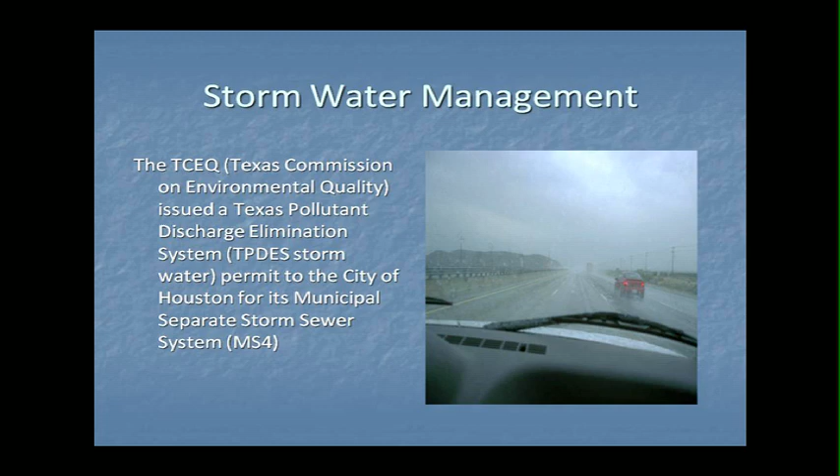Our MS4 permit is called Separate Storm Sewer System because you can have some cities or states that combine their sewer system. Both sanitary and storm will go to the treatment facility. Here in the state of Texas, they're separate. The storm sewer goes directly to the bays and the bayous and to Galveston Bay. Our sanitary goes to treatment facilities.

Now, even though I said that MS4 is a municipal separate storm sewer system, you still may ask, well, what is a municipal separate storm sewer system? It's anything. It's your storm sewers, it's your ditches, it's anything that will carry storm water. When it rains, the rain water has to go somewhere and it's channeled off to one of our collection systems, and it is discharged directly into the bays and the bayous.

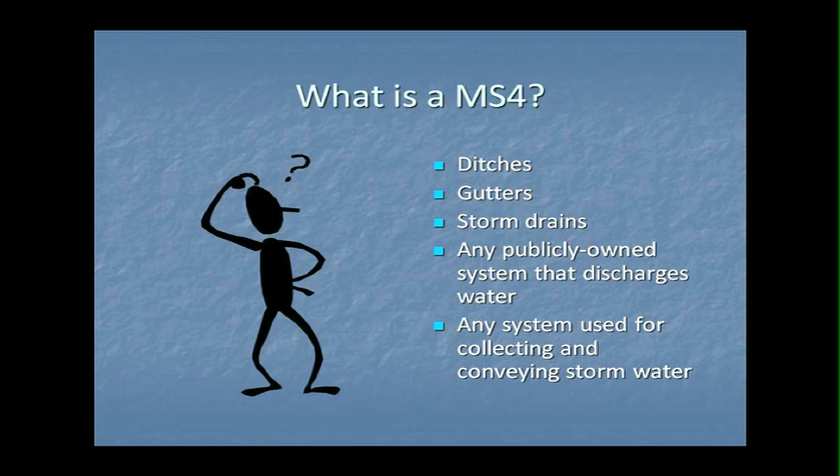Okay, what is the reason for a stormwater permit? It helps prevent pollutants or minimize the impact that pollutants have in our streams, lakes, bayous, wherever you may fish or wherever there may be aquatic life.

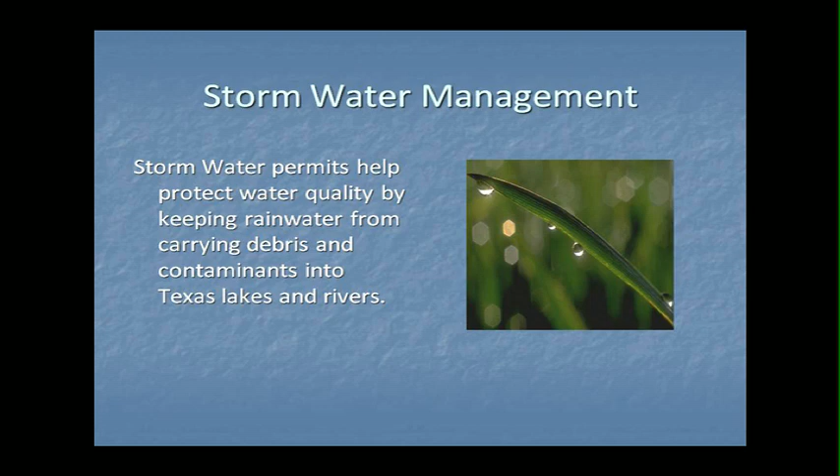City of Houston involvement: because we do have an MS4 stormwater permit, we are required to implement programs to ensure that what leaves the City of Houston's storm sewer will minimize the impact on the state of Texas waterways. And in doing so, we have 8 programs that we have to adhere to in order to come and remain in compliance with our stormwater permit. And one of those programs is to effectively prohibit non-stormwater discharges.

Now, because we do prohibit non-stormwater discharges from entering into our sewer systems, even though there are going to be some circumstances where there's going to be some type of discharges, we can allow certain non-stormwater discharges to enter into our storm sewer system, because, as everyone knows, nothing should go into the storm sewer but rainwater. And the reason why is that we do not treat our

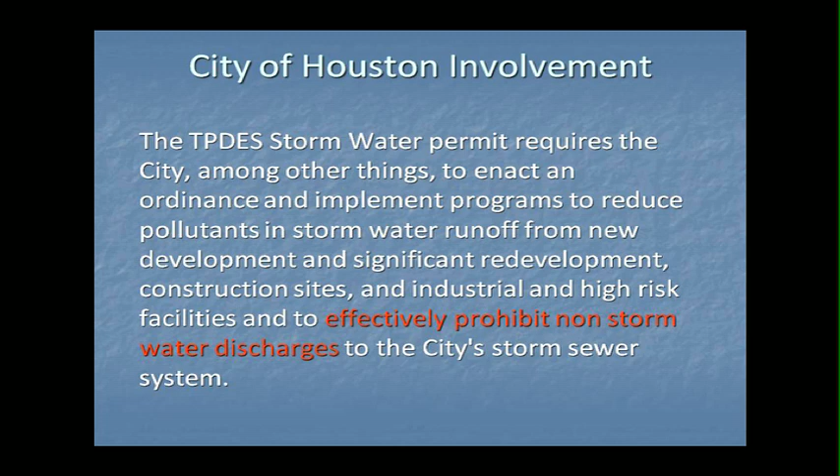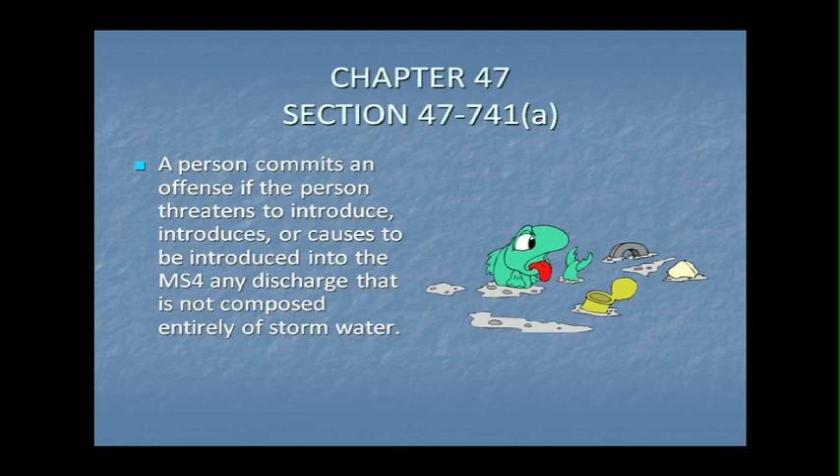in our ordinance, we have offenses in place so that we can enforce our ordinance so we will remain in compliance with our permit. And one is that you commit an offense if you threaten to introduce, or cause to be introduced, anything into our storm sewer system that is not composed entirely of storm water. So in other words, if you introduce or cause to be introduced anything other than storm water into our storm sewer system, you have committed an offense.

Now, as I stated earlier, there are some non-stormwater discharges that are allowed. And with some of these, there are certain conditions that you have to be in compliance with in order to discharge those. Say for instance, potable water. It has to be dechlorinated. Another one that would have to be dechlorinated is swimming pools. So just because we're saying that you can discharge potable water does not necessarily mean that you can just go ahead and discharge it, especially if there's chlorine in it.

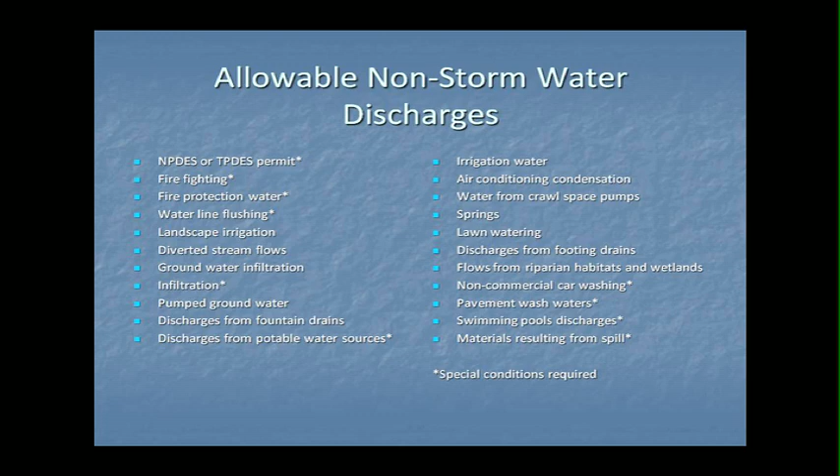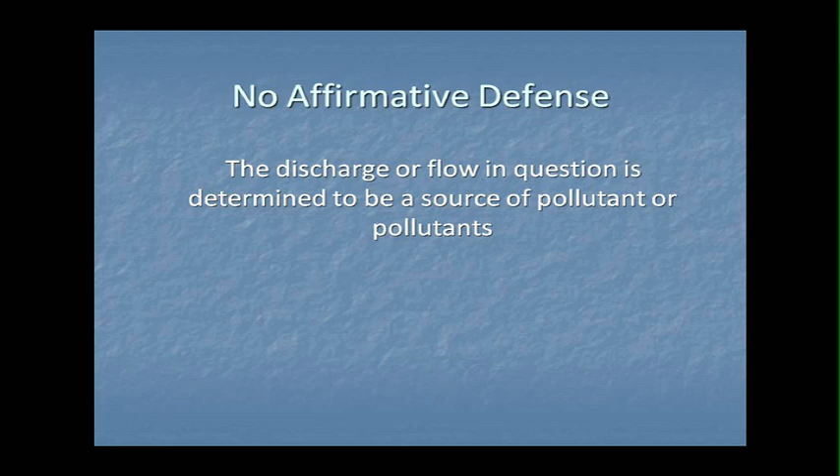And because of that, just because we do allow those non-stormwater discharges, you cannot use that as a defense if it is deemed that it is polluting our storm sewer system. Okay.

Several years ago, I can't remember when, we came up with some best management practices, guidelines, not a permit, but guidelines to help some out when they are dealing with discharges or cleaning and what have you. When these guidelines came out, we used our ordinance as well as our permit to put these guidelines, not a permit, guidelines together.

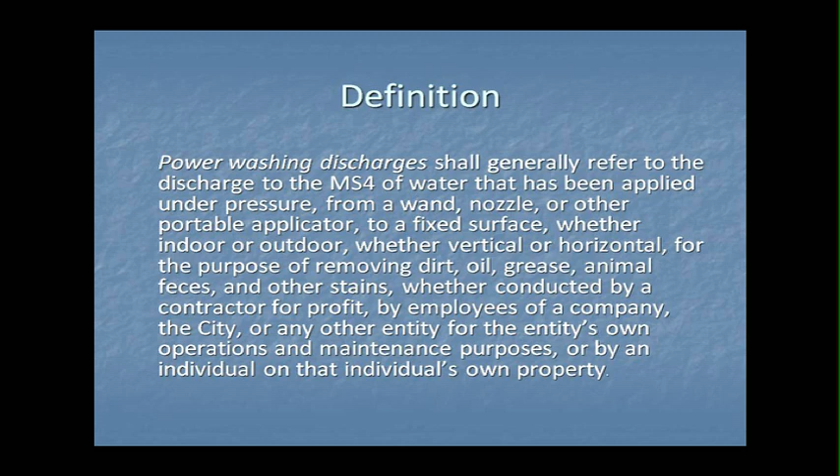And this was for cosmetic cleaning, and this is the definition of power washing that we address in these guidelines, not a permit, guidelines. And it's self-explanatory. Anything that's used under pressure to remove dirt, oil, grease is considered power washing. Okay. In the guidelines, we addressed these four categories of activities.

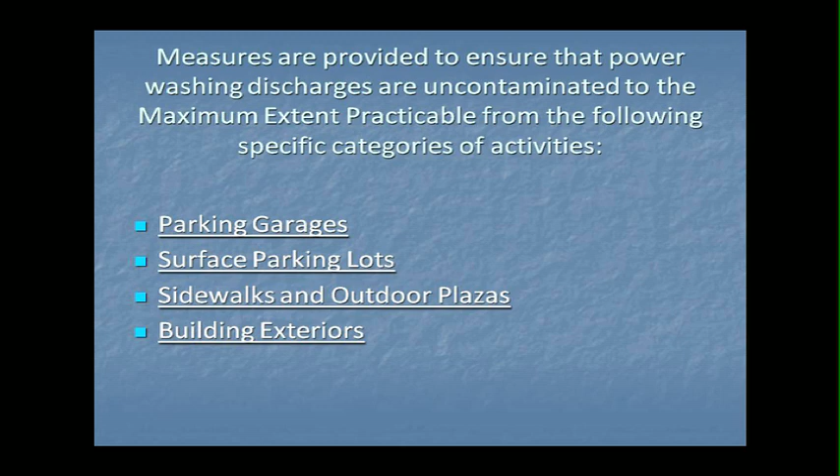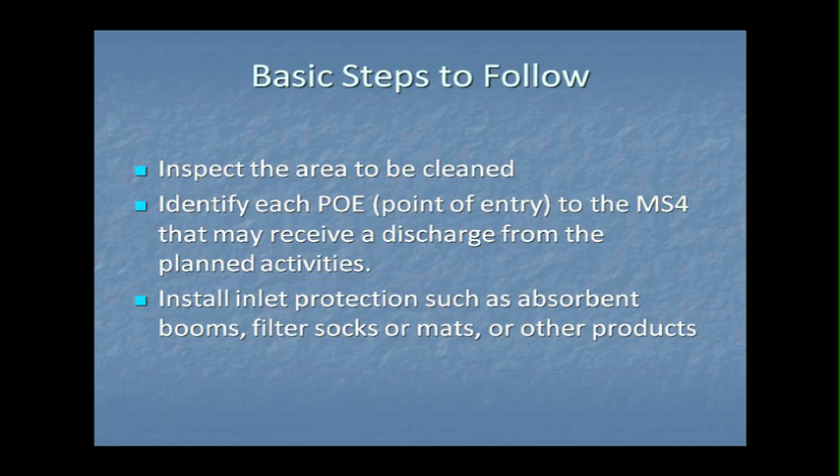And these are some of the basic steps taken from the guidelines. Inspect the area to be cleaned, locate the point of entry to the MS4, install inlet protections such as absorbent booms, filter socks, mats, or other products. And during the process, any inlet protection that is observed not to be functioning properly shall be promptly repaired or replaced. This is one of the steps that people most commonly don't follow.

When you lay down your inlet protection, some just go ahead and start cleaning or doing their activity, and not come back and check periodically to make sure that that protection is doing what it was designed to do. Yeah.

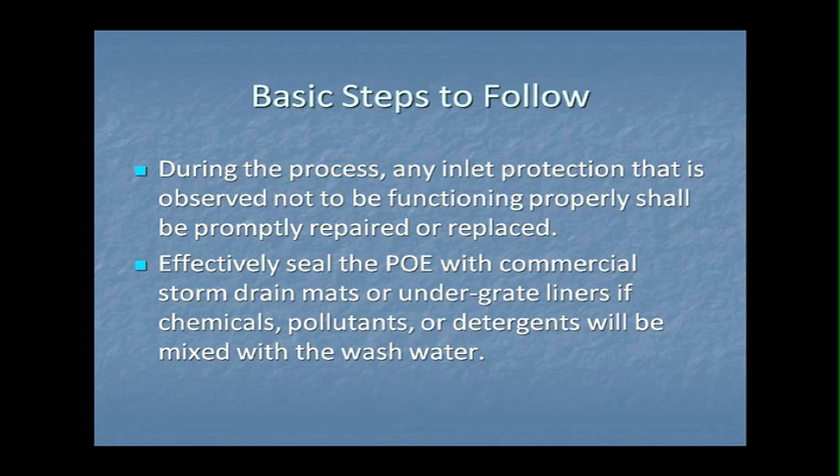The problem with that is, and it's going to continue on my next slide, let me go to the other slide, and I'm going to address that, okay? Now, you need to effectively seal the point of entry with the inlet protections, so that any chemicals, pollutants, or detergents that are mixed with the storm water or wash water would not enter into the storm sewer system.